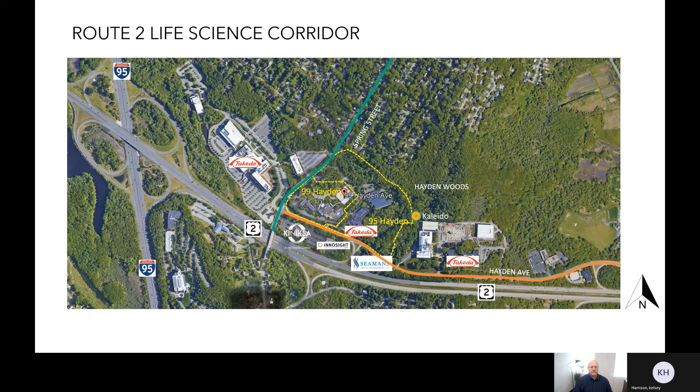Zooming in a bit from the site context map, we can see the existing 95 and 99 Hayden Life Science campus. Moving from left to right, we have 5 existing buildings, buildings A, B, C, D, and the 99 garage on the 99 Hayden Avenue site. Then we have 95 and the 95 garage on the 95 Hayden Avenue site.

Development for this campus began in the 1960s as Ledgemont Labs, a leading research laboratory that attracted scientists from all over the world to this location in Lexington. The campus is now deserving of further investment.

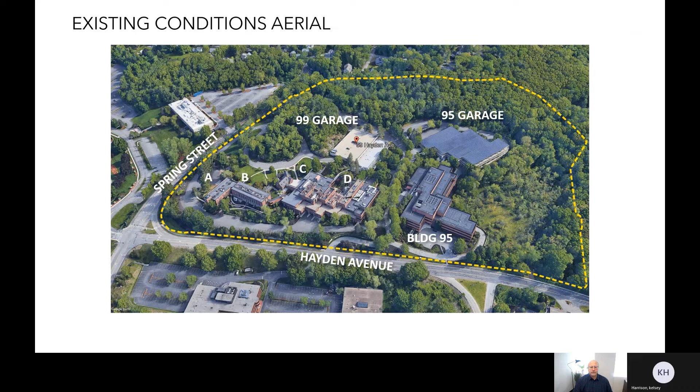This aerial shows the garage and the building at 95 Hayden Avenue, which will remain through the proposed redevelopment. On the building and garage, we installed a 1 megawatt photovoltaic solar array in 2014, one of the largest in Lexington. This is a key feature of our sustainability efforts on campus, with the proposed redevelopment enabling us to double down on sustainability efforts on the campus.

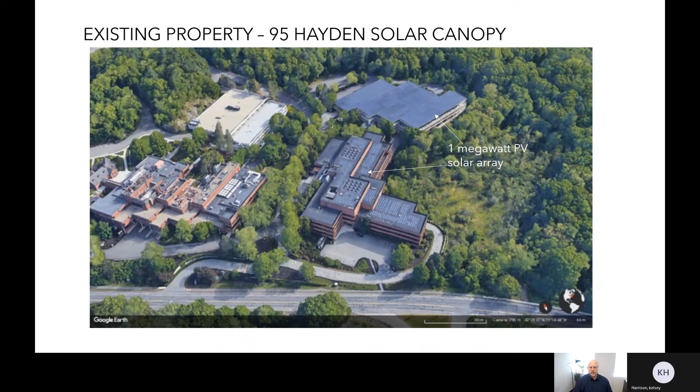I'll discuss these efforts more later on, but this includes designing the planned new buildings to LEED Gold standards and investing in hybrid HVAC systems within the buildings.

Now that you're oriented to the existing conditions and site, let's talk about the proposed redevelopment and what we aim to do. Our project goals include repositioning the campus to be a leading life science campus in the Hayden Avenue Life Science Corridor by redeveloping significant new Class A lab space.

Limiting development impacts: we aim to do this first and foremost by limiting the redevelopment to the southwesterly corner of the site. If you look at the existing conditions plan, the redevelopment is concentrated in the white portion of the lower left-hand corner. In so concentrating development, we hope to further limit impacts by replacing and renovating existing buildings as appropriate.

Finally, we aim to minimize impacts to extensive areas of vegetation and natural rock outcrops on the site, with design incorporating existing ledge and tucking much of the new parking under buildings rather than creating large paved parking lots.

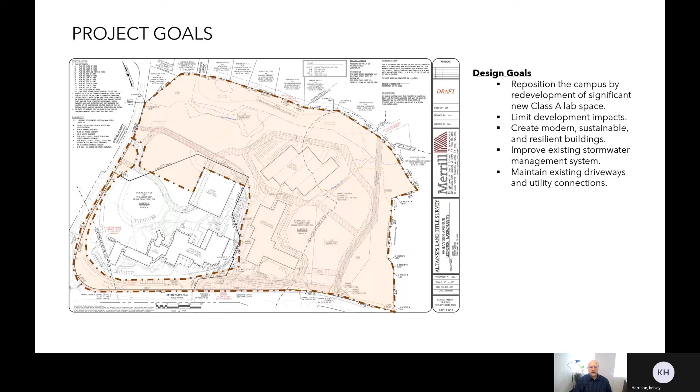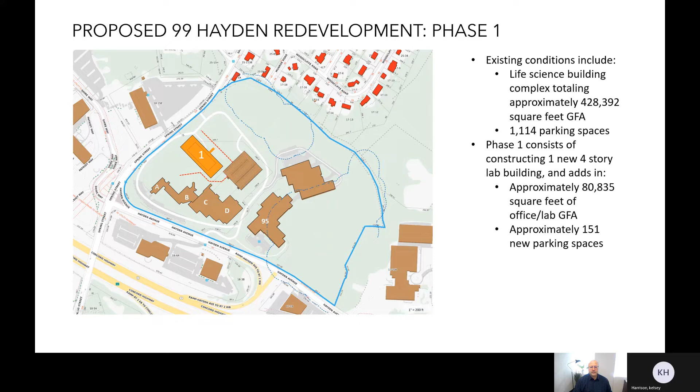To make these project goals happen, we have crafted a phased redevelopment plan. In phase 1, we plan to construct new building 1, represented by the orange building, a new 4-story lab building with parking underneath it. This will add approximately 80,000 square feet of office lab space and about 150 new parking spaces.

The second phase consists of razing 2 existing buildings, buildings A and B, and constructing new building 2 in their place, just south of building 1, including parking underneath it. Additionally, existing buildings C and D will be extensively renovated and expanded to create building 3, represented by the purple building next to building 2. This will add approximately 150,000 square feet of office lab space and approximately 230 parking spaces.

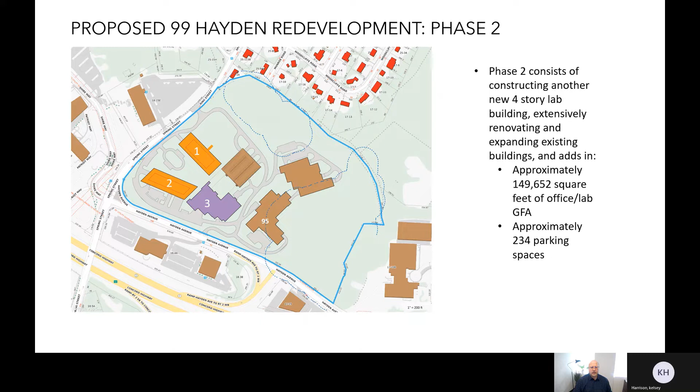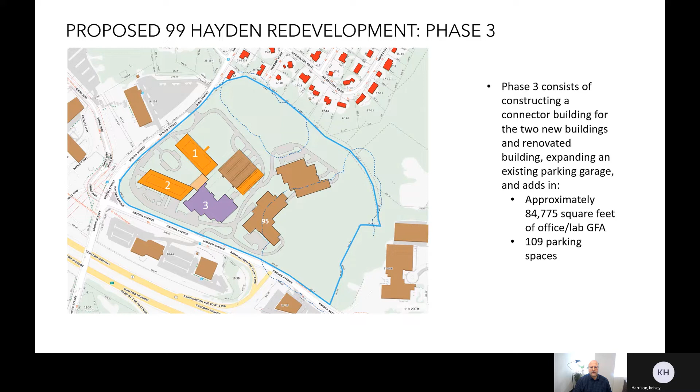The third and final phase consists of building a connector building attached to new buildings 1 and 2 and renovated building 3. Additionally, this phase contemplates an addition adjacent to the existing parking garage. This will add approximately 85,000 square feet of office lab space and approximately 110 parking spaces.

At full build out of the redevelopment, there will be 2 new 4-story office lab buildings, buildings 1 and 2, in the southwesterly portion of the site; 1 extensively renovated and expanded building, building 3, just east of building 2; a connector building in the middle of buildings 1, 2, and 3; an addition adjacent to the existing parking garage; and some associated surface parking.

When all is said and done, this campus will be repositioned as a leading life science campus with approximately 743,000 square feet of office lab building space and 1,608 parking spaces.

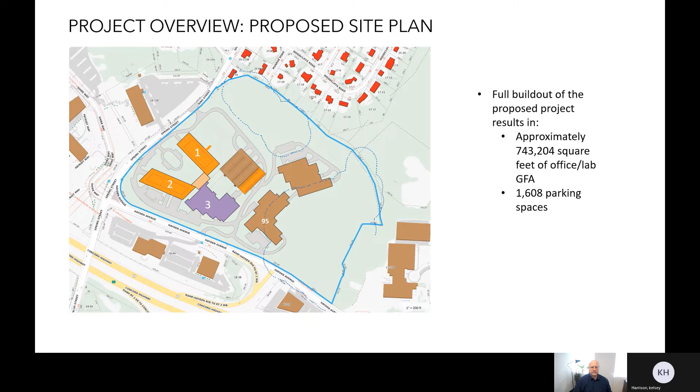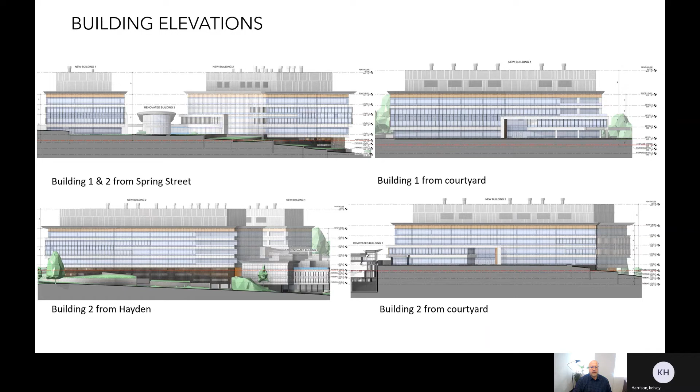The elevation in the bottom left-hand corner shows building 2 from Hayden Avenue. This elevation reflects how dramatic the topography change can be on the site. The elevation in the bottom right corner shows building 2 from the courtyard.

Now that you have a sense of the massing of the buildings, we'll go on a virtual drive moving south to north to see what buildings will look like from various viewpoints. The site plan here shows the viewpoints of the following 5 renderings. We'll start at the bottom of the plan and make our way up.

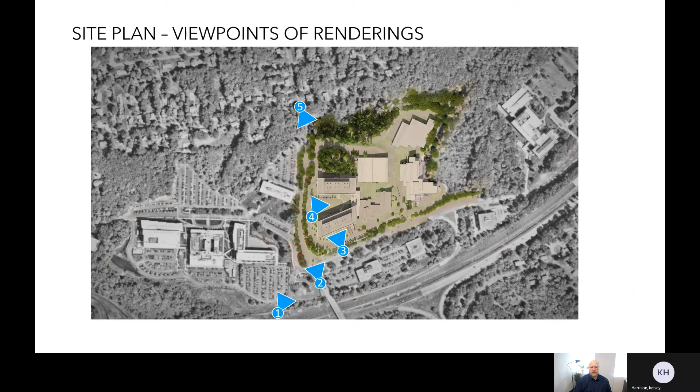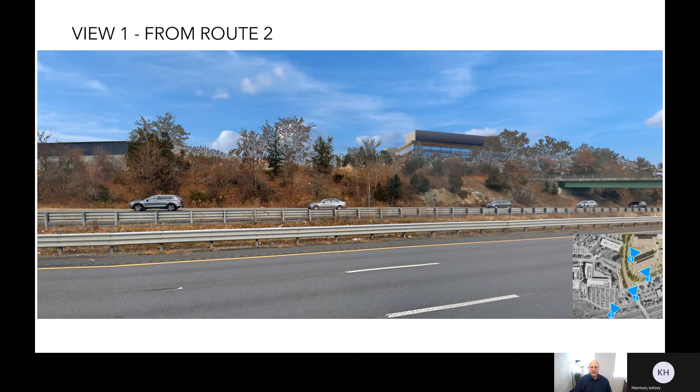Here's our first and most southerly viewpoint, from Route 2. On the left of the screen is an existing neighboring building, currently housing Takeda Pharmaceuticals. On the right side is proposed building 2. As you can see, our proposed building is comparable to neighboring buildings, with the difference in visibility largely attributed to the varying topography of our site.

Continuing north on our virtual drive, here is the view of Building 2 from Hayden Avenue.

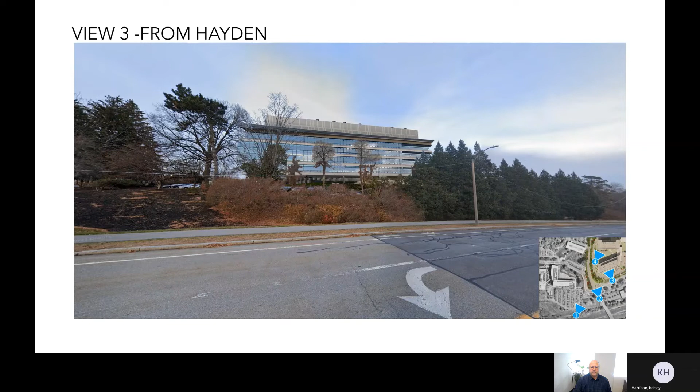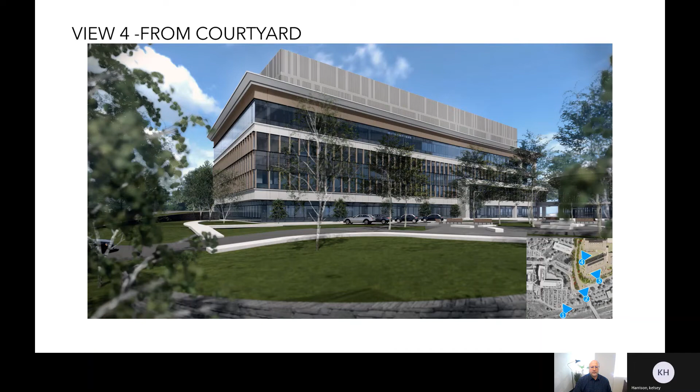We've moved north from Hayden Avenue to the courtyard, viewing Building 1 from within. The first phase of the redevelopment will be constructing this new Building 1, which will be characteristic of the new renovated buildings, with large floor plates and taller floor-to-floor heights suited for life science buildings. These buildings will be designed according to current LEED design standards with highly efficient building envelopes.

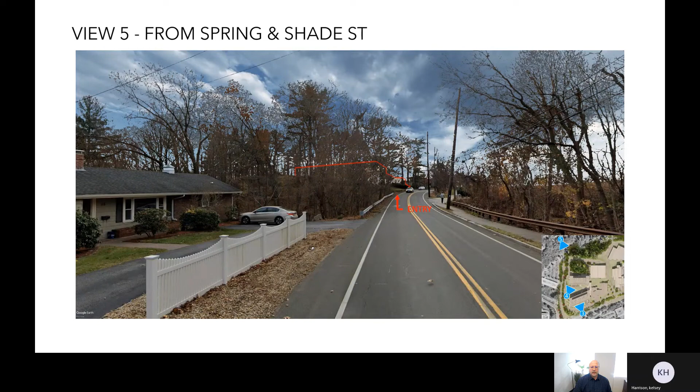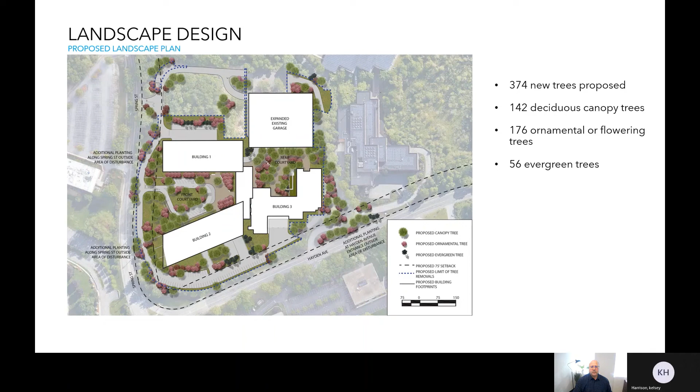Now we're at the final, most northerly viewpoint, looking south to the site from Shade Street. The new buildings will be largely obscured by the heavily wooded northerly section of our site, which will be maintained as a buffer. Within the project area, we've developed a robust landscape design plan to plant a significant number of trees.

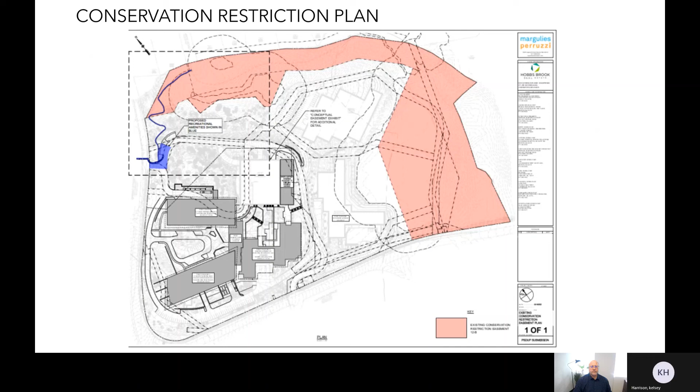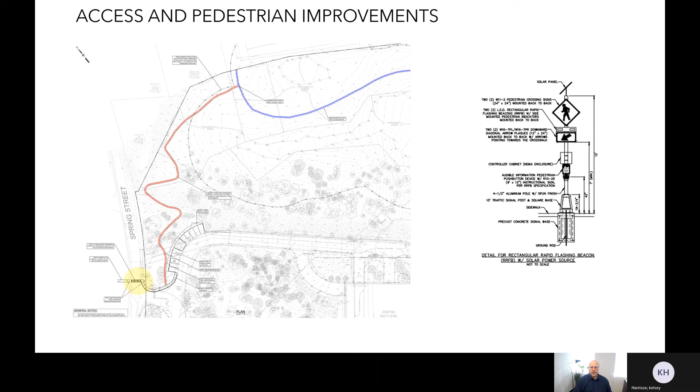Hobbs Brook prioritizes designing sustainable buildings. For this redevelopment, the building has benefited from input of the Sustainable Lexington Committee. We already have installed a 1 megawatt solar canopy on this site, and to build on that, we're designing these buildings to meet LEED standards with highly efficient building envelopes. With these highly efficient buildings, we'll be able to use all-electric HVAC systems on site.

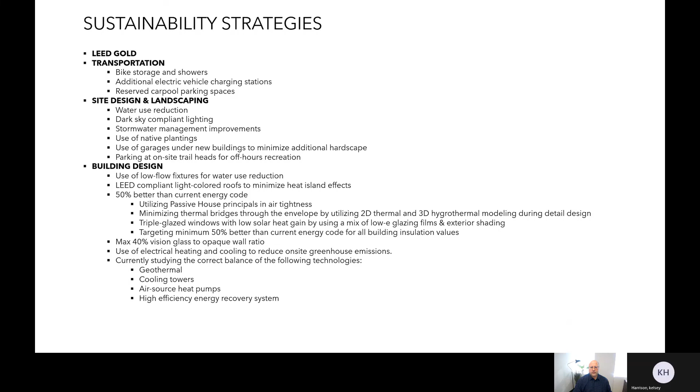Beyond these efforts, we're planning to have many additional measures geared towards sustainability, including a transportation demand management plan and amenities geared towards encouraging alternative modes of travel, electric vehicle charging stations, improved stormwater and drainage management and infrastructure, and water use reduction strategies.

This development will reposition an existing life science campus to be a leader in the Hayden Avenue Life Science Corridor. In doing so, there will be numerous public benefits. Financially, once completed, this redevelopment will result in $3.7 million of net new revenue annually to the town, representing a considerable increase in stable tax revenue to help lessen tax pressures on Lexington residents.

Environmentally, this poses an opportunity to replace inefficient buildings with new buildings designed in accordance with LEED standards, which are aligned with Lexington's efforts to shift away from fossil fuels and towards all-electric HVAC systems. Beyond that, this includes significant recreational enhancements with a new trail connection and public access to Hayden Woods.

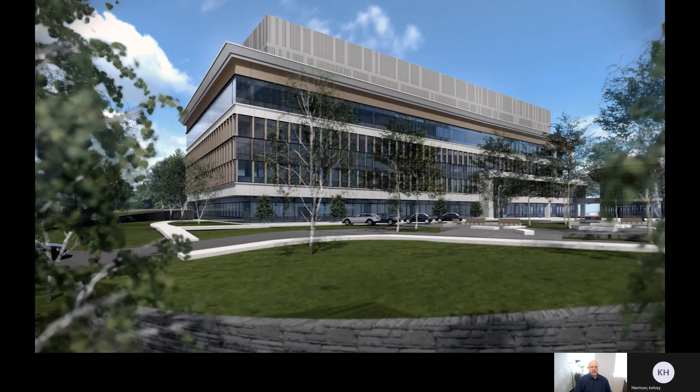Starting with Ledgemont Labs in the 1960s, this site has been a leader for scientific innovation in Lexington. Recognizing this past and the site's location in the heart of Lexington's life science corridor, this proposed reinvestment will reposition the site into the leading life science campus once again.